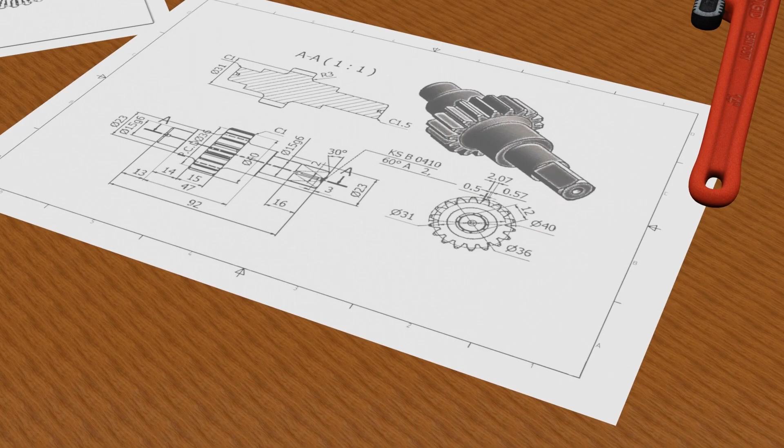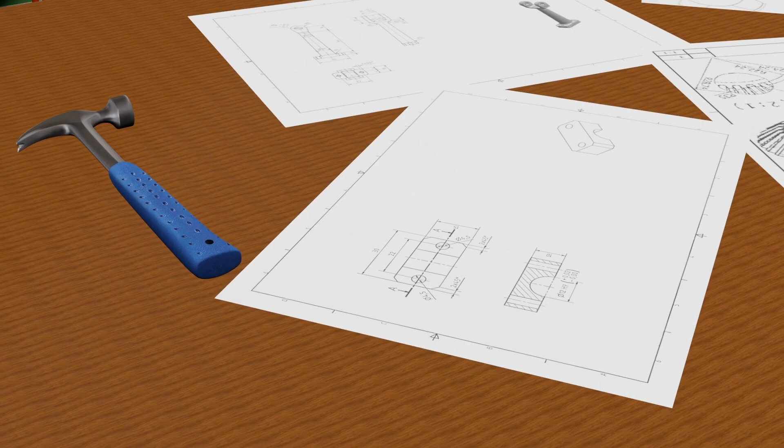We may have heard the statement, drawings are the universal language of engineers. Drawing serves as the mode of communication for engineers to express and communicate ideas, dimensions, specifications and technical information. That's why they are so important.

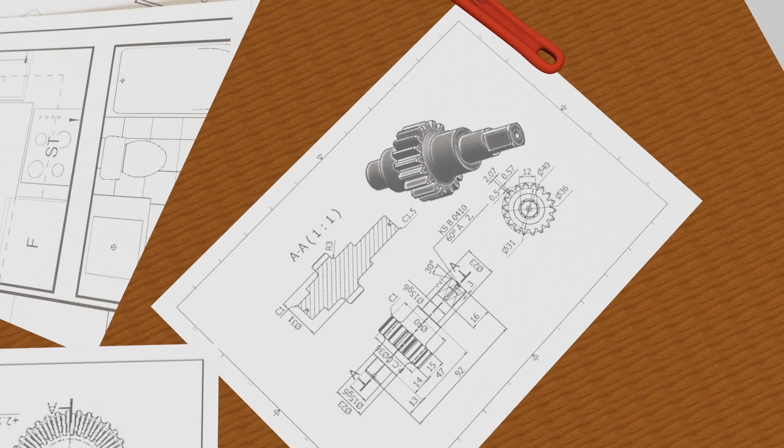Most engineering students are required to study engineering drawing or engineering graphics in their first year to learn about drawings. The concept of orthographic projection, specifically first and third angle projection, is fundamental and crucial for understanding the drawings. In this video, we will explore the concept of orthographic projection using animation.

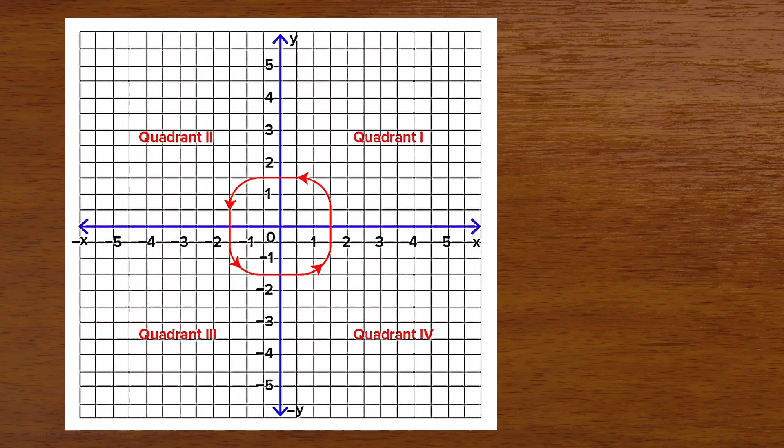We have already studied the coordinate graph in school, including the 4-quadrant graph. It consists of two coordinates, namely x and y coordinates. Let's see a brief explanation of the 4-quadrant graph. If the x value is positive and y value is positive, then it is the first quadrant. Similarly, negative x and positive y represent the second quadrant. Negative x and negative y represent the third quadrant. Positive x and negative y represent the fourth quadrant.

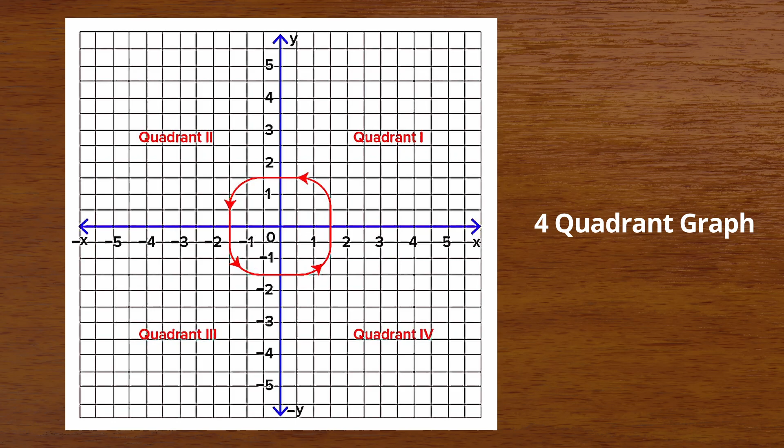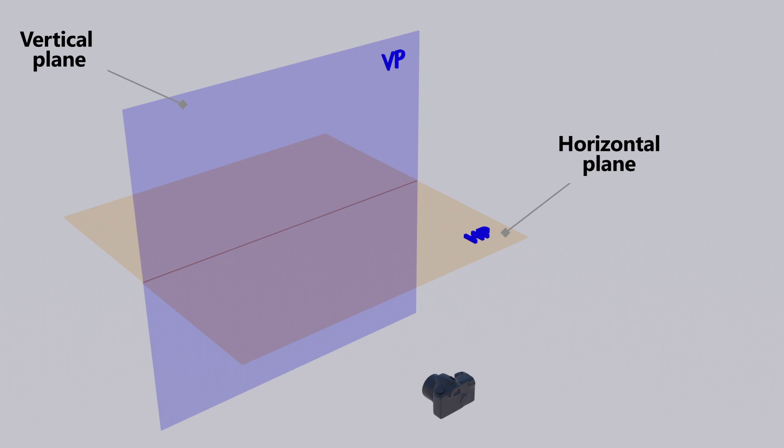This construction of the 4-quadrant graph forms the basis for orthographic projections. In this context, the horizontal plane replaces the x coordinate and the vertical plane replaces the y coordinate. The horizontal plane and vertical plane are also referred to as planes of projection. The position from which we observe the object is called the point of view or observer. In this video, this camera serves as the point of view or observer.

First quadrant represents the region in front of VP and above HP. Second quadrant represents the region behind VP and above HP. Third quadrant represents the region behind VP and below HP. Fourth quadrant represents the region in front of VP and below HP. Now, let's consider this 3D object as an example for this video. Place this 3D object in the first, second, third and fourth quadrant.

There is an important point to understand. For the first and fourth quadrant, the object is in between VP and point of view. For the second and third quadrant, the projection plane is between the object and the point of view. Also, there is a condition or assumption regarding projection planes. That is, the horizontal plane can rotate only in clockwise direction.

Now, let's add two auxiliary vertical planes. The plane on the left side is called the left auxiliary plane and the plane on the right side is called the right auxiliary plane. There are no conditions for auxiliary plane rotation. Orthographic projection is a method of representing the exact shape of a three-dimensional object on a two-dimensional sheet through two or more views. These views can include the top view, front view, left side view and right side view.

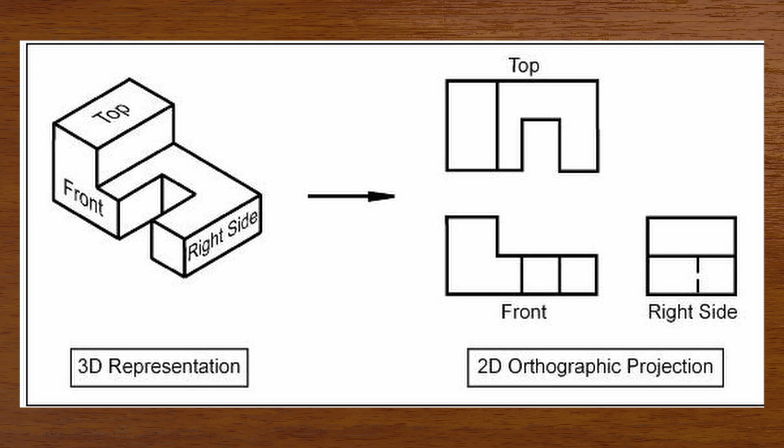Let's see the concept of first angle projection. Place the 3D object in the first quadrant. As mentioned earlier, the object is between the plane of projection and the point of view. Therefore, all the planes in first angle projection are considered solid or opaque planes. For better understanding, let's assume that we are using a light or lamp from the point of view position to produce light rays. These light rays provide us with a final image or the required view.

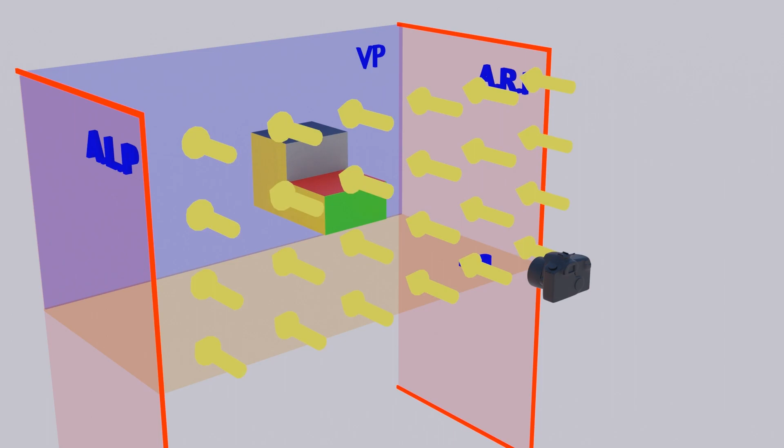Since the planes are opaque and the object is between the plane and observer, the light rays from the lamp pass across the object and fall onto the plane behind it. This produces the required view on the plane which is behind the object. So, the front view is produced on the VP.

To obtain the left side view, move to the left side of the front view observer position and observe the object. Once again, imagine the light rays. Now, the left side view is produced on the right auxiliary plane. To obtain the right side view, move to the right side of the front view observer position and observe the object. Again, imagine the light rays. Now, the right side view is produced on the left auxiliary plane.

To obtain the top view, move to the top side of the front view observer position and look down towards the object. This produces the top view on HP. As we know, orthographic views must be represented on a single 2D sheet and HP rotates only in clockwise direction.

Therefore, rotate HP in clockwise, left auxiliary plane in clockwise and the right auxiliary plane in anti-clockwise direction. Thus, in first angle projection, the right side view is at the left end of the front view, left side view is at the right end of the front view and the top view is below the front view.

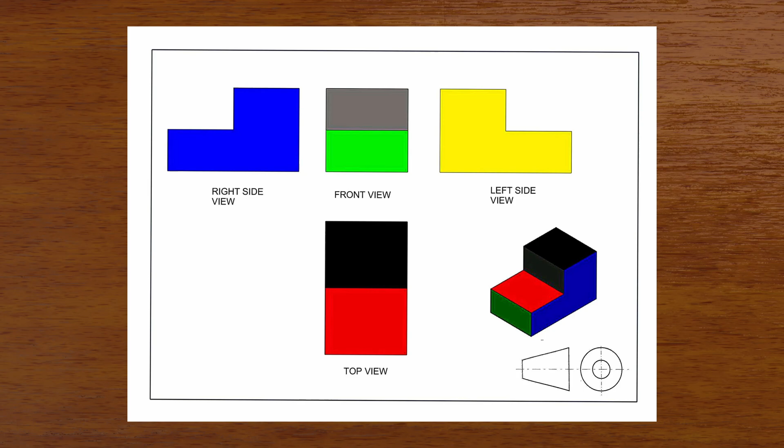Now, let's explore the concept of third angle projection. Place the 3D object in the third quadrant. As mentioned before, the projection plane is between the object and the point of view. Therefore, all the planes in the third angle projection are considered as transparent planes. Now, the light rays from the lamp or light source incident on the object and reflect back onto the plane in front of the object. Hence, the required view is produced on the plane in the front of the object, not behind it. This understanding is crucial. So, the front view is produced on VP.

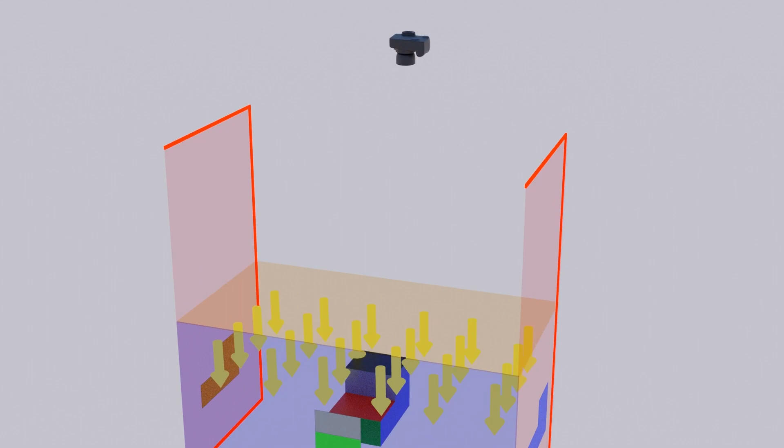To obtain the left side view, move to the left side of the front view observer position and observe the object. Once again, imagine the light rays. Now, the left side view is produced on the left auxiliary plane. To obtain the right side view, move to the right side of the front view observer position and observe the object. Again, imagine the light rays. Now, the right side view is produced on the right auxiliary plane. To obtain the top view, move to the top side of the front view observer position and look down towards the object. This produces the top view on HP.

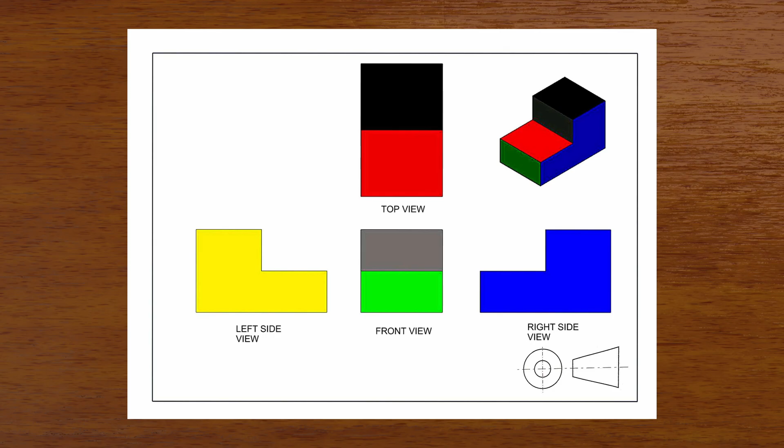Rotate HP in clockwise, right auxiliary plane in clockwise, and left auxiliary plane in anti-clockwise direction. Thus, in third angle projection, the right side view is at the right end of the front view, left side view is at the left end of the front view, and top view is above the front view. Mostly, first and third angle projections are used, while second and fourth angle projections are not commonly used. The reason for this will become clear if you have properly followed this video until now.

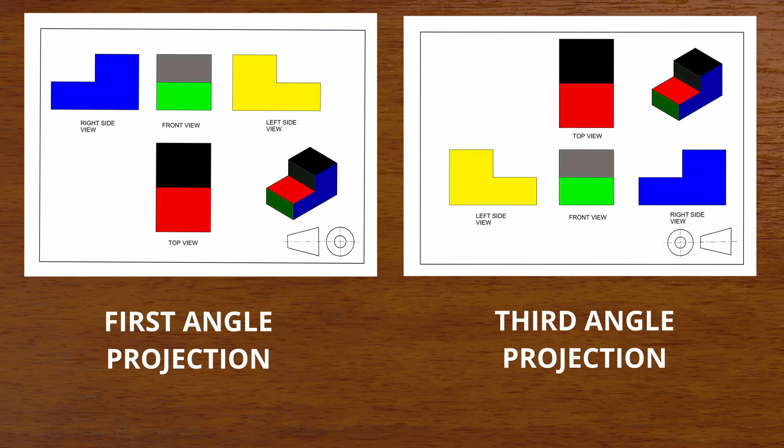For example, let's consider second angle projection. In this case, the projection plane is between the object and the observer, and the plane is transparent. As a result, front view is produced on VP and top view is produced on HP. When HP is rotated clockwise, the top view and front view overlap each other. That's why it is not used. The same principle applies to the fourth angle projection, where the front view and top view overlap each other.

Symbols for first and third angle projection. Here, truncated cone or frustum of cone is the 3D object, and its front view and side view or top view are represented as a symbol. A frustum of cone is a part of the cone obtained when it is cut by a plane into two parts. The reason for using a frustum of cone is that it is a simple 3D object with different side views. Although a cube, rectangular bar, and a cylinder are simple 3D objects, their side views are similar. You can easily understand the projection symbol using the concept of first and third angle projection.

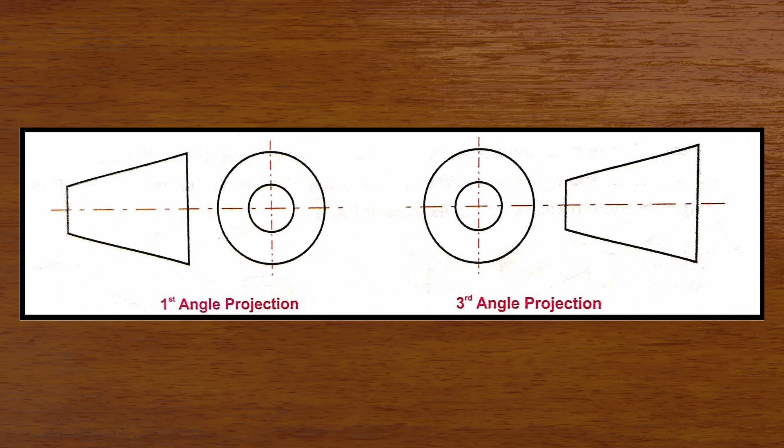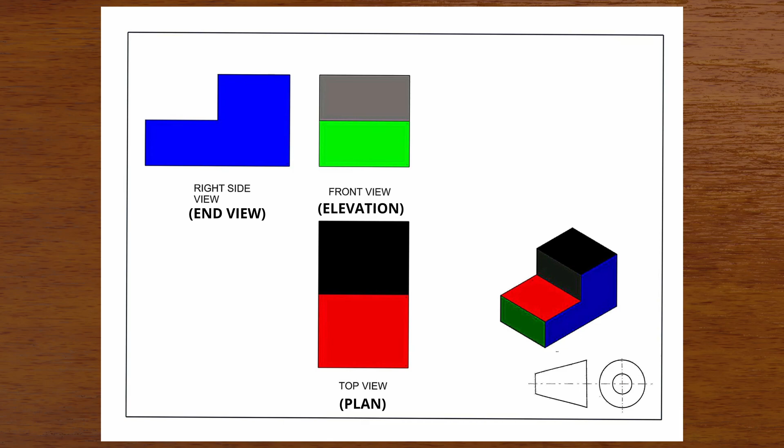The top view is also known as the plan, the front view is also known as the elevation, and the side view is also known as the end view. First angle projection is mostly used in India, Canada, and European countries, while third angle projection is primarily used in the United States and Australia.